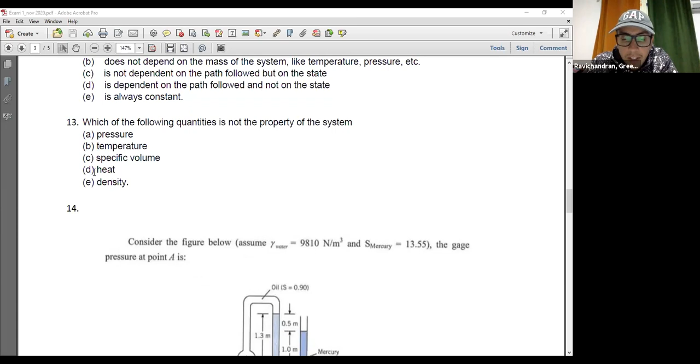13, D. Specific volume, C I think. Heat. Heat is not a property, it's a path function. Okay, 14.

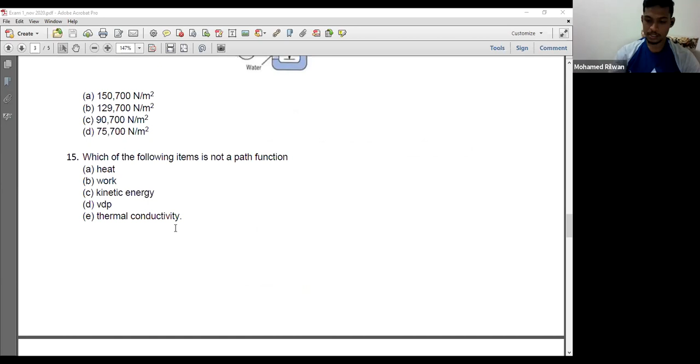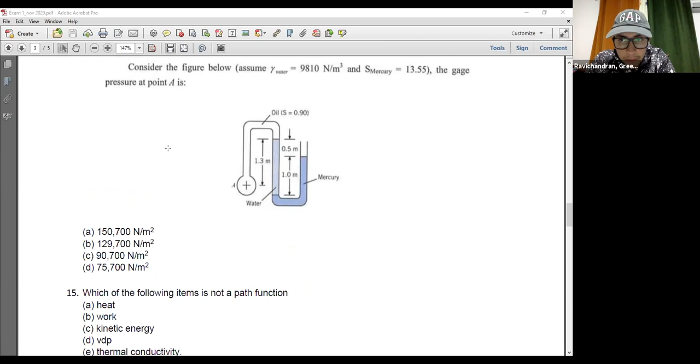15, so the following items, I put V D P. Which one? I'm talking about 15. 15 or 14? 14 we don't solve, yeah 15. D, no, 15 is thermal conductivity. Because thermal conductivity is a property, not a path function.

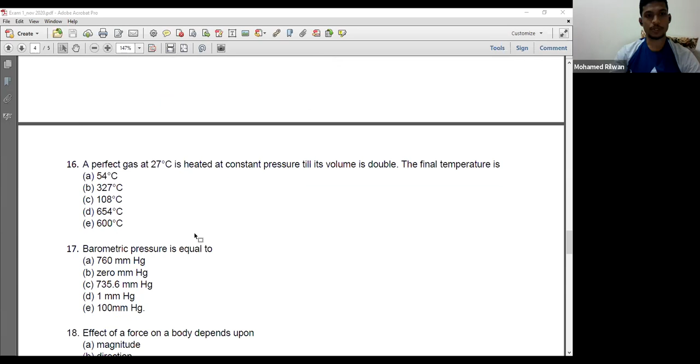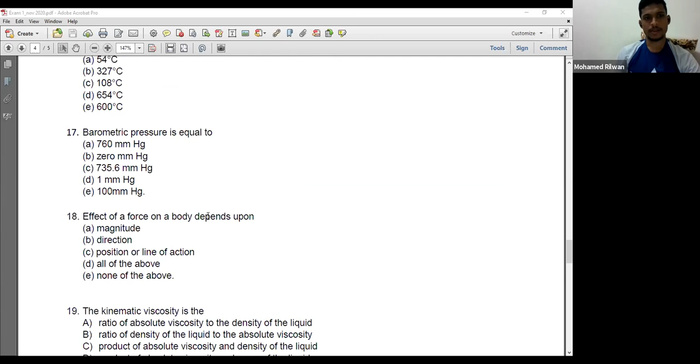Okay, 16. 54 degree, 54, yeah, A. Let's see answers together. Okay, 17. 760 mm Hg, yeah, all agree? A, yeah, okay A. 18.

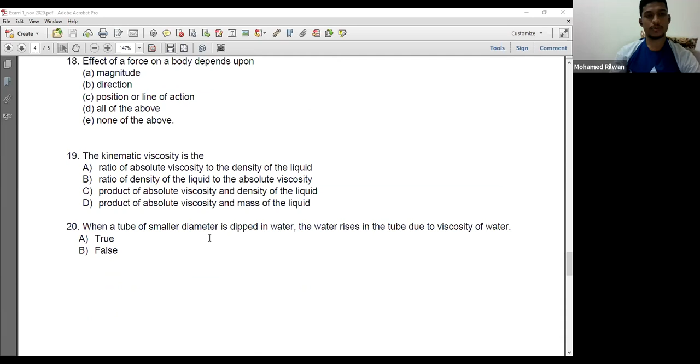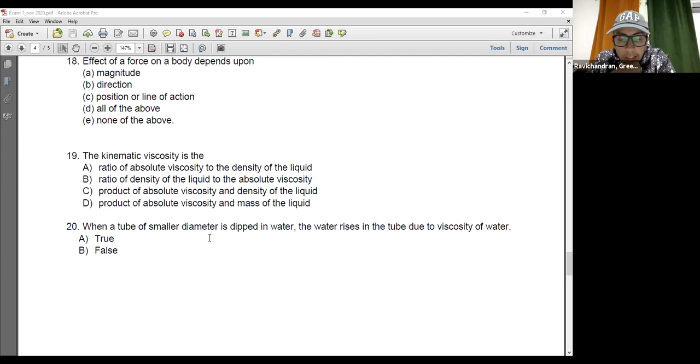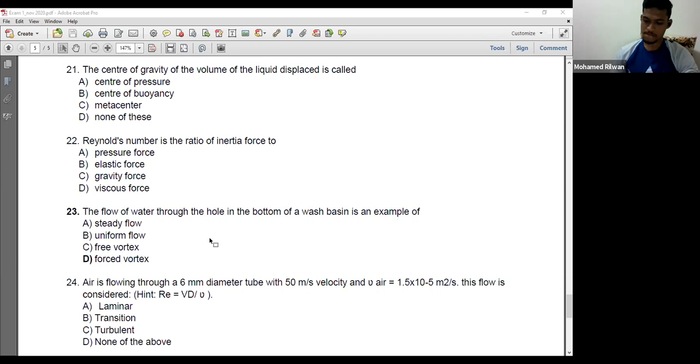Put this viscous, D, D. D, viscous force, yes. 23.

3 is uniform, C. No, it's vortex, free vortex, C, C, free vortex. C, free vortex, yes, C. 24.

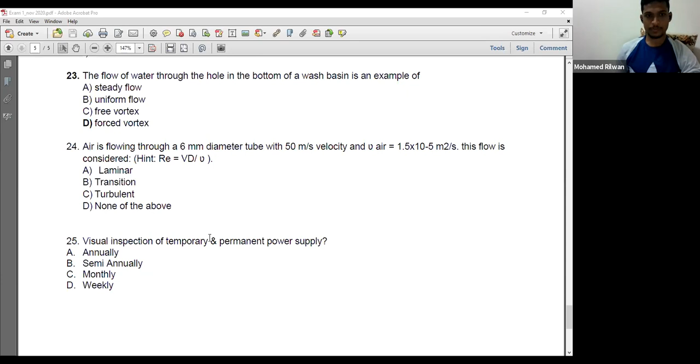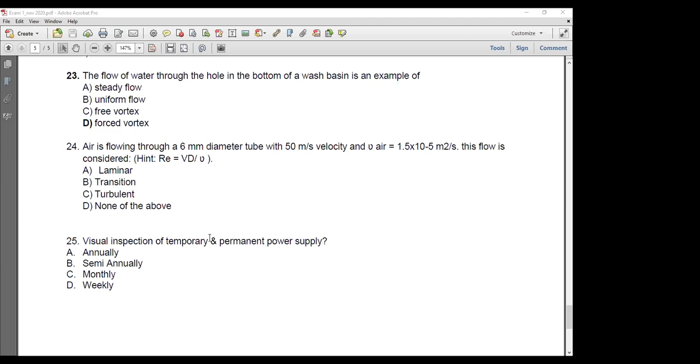What's the answer? Mute mic please. Anyone not solving or sharing with us, mute mic. Is that laminar? 25, we will solve 24 together. Because we have a debate here between laminar and turbulent. 25. B. 25 is A, yes. Let's go check the numerical problems.

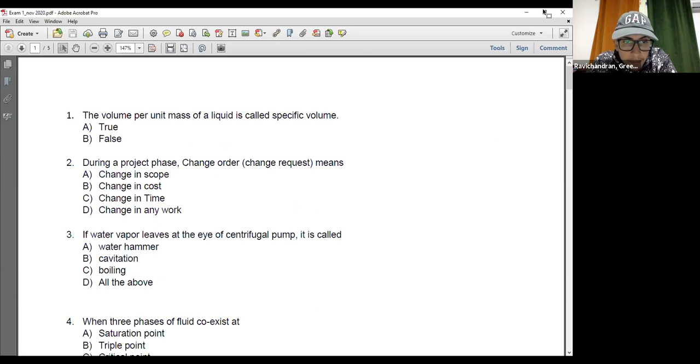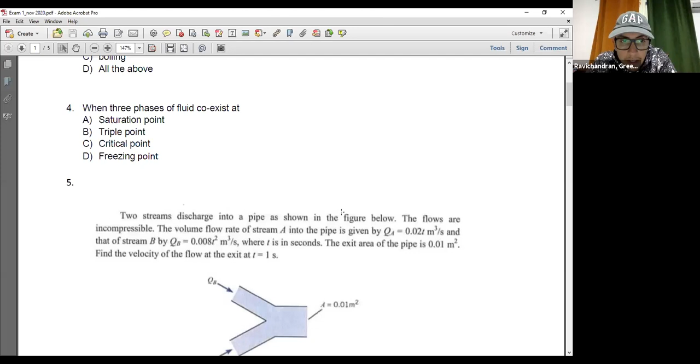Okay. It's 25. Question number 25. 25? 25 is A, yes, question number 25, answer is A. It's asking that, as for local code, I want to ask this question.

We at least check quarterly or semi-annually the power transfer. How does this become annually? When annually and when semi-annual, something like this? Yeah, we have a session for this one. No problem, okay, we will cover that in that session.

Yes we will, because we're not just giving QCDD or NFPA. NFPA says QCD asks more detailed questions for many things. For NFPA it's just specific for some questions, mainly related to inspection time and testing time. But we check every 3 months minimum, related to alarm, fire and safety, related to anywhere.

No, he's asking about power transfer, the Kahramaa or generator power. Kahramaa and generator power, I don't see this question before. The question is, he's asking whether change of power transfer means generator power or Kahramaa power. No, question again, yes, can you just open that question? Your voice is not clear, engineer, your voice is breaking.

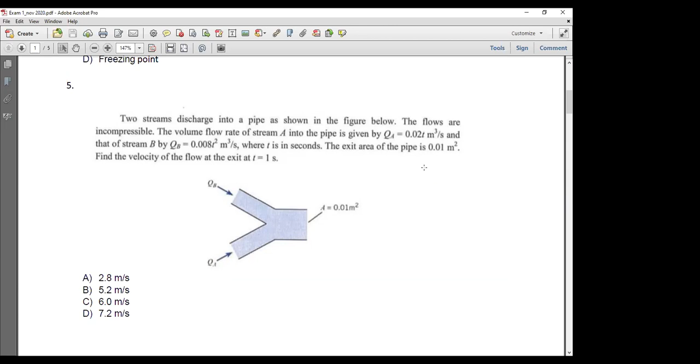Now focus with me on the answers please. 2 streams discharge into a pipe, as shown in the figure, the flows are incompressible, so we can follow the continuity equation directly. We will study the continuity equation today, this is the first thing we will start, and we will see this one.

This is what it is. At the beginning we see a circle, and now this happy face, but now it's continuity, okay. This is one of the famous equations used in the exam: Q equals A V, where Q is the discharge, A is area, V is velocity. So here, the volume flow rate at stream A into the pipe, this is stream A, QA is given directly as 0.02t meter cube per second.

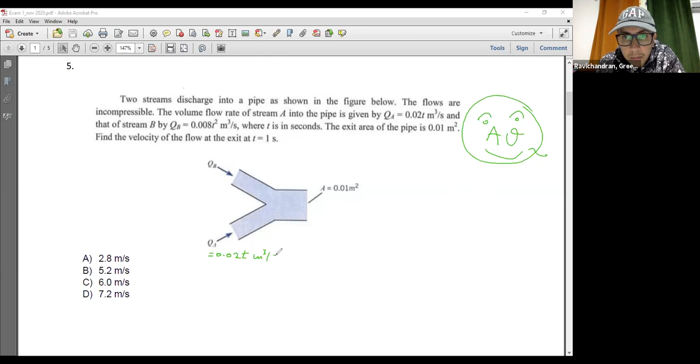And that of stream B by QB is equal to 0.008 T squared meter cube per second, where t is in seconds. The exit area of the pipe is 0.01 meter square. Find the velocity of the flow at the exit at time t equal 1 second.

So at time t equal 1 second, the required is velocity. As per the continuity equation we studied today, sum of Q in equals sum of Q out. How many inputs? A and B, so QA plus QB. How many outputs? One output, for example Q3, so this equals Q3, or whatever we call it.

So QA is given directly as 0.02t, plus QB given directly as 0.008t squared, equal to Q, which is equivalent to AV, because it's not given directly. So I will use the meaning of Q equals AV. He needs to calculate velocity at time t equal 1 second, so substitute for time t equal 1.

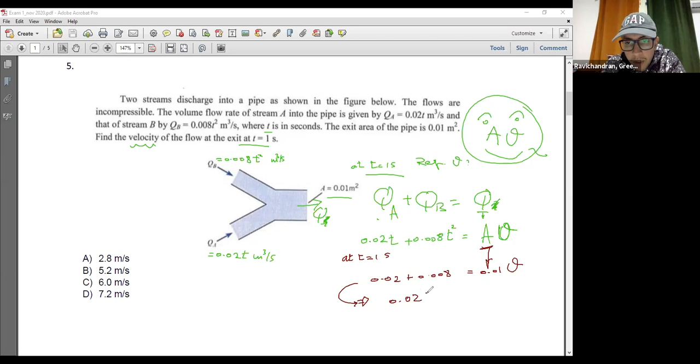Excuse me, is it 0.01 or 0.028? Which one, this one? There's some sum, 0.028, right here. Yeah, I didn't put the sum until now. This is the area, I substitute the area here. So this will be 0.028 equal 0.01 times velocity, this is the 0.01 area.

So the velocity is equal 0.028 divided by 0.01, which is equal to 2.8 meter per second. Any question for this one?

Clear. Okay, let's continue. Again,

As per the continuity equation we studied today, sum of Q in equals sum of Q out. So QA plus QB, this input here, equal to the output, which is this Q. This one is 0.02 plus 0.008t squared, and this is t equal to Q. He needs all this at t equal 1, so the sum of this is 0.028 equal Q. Now I know the Q here.

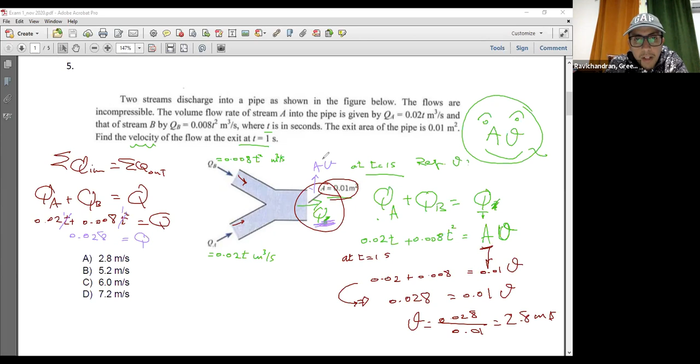This Q is equal AV. A I have, so the required actually is V, this is the exact required. So Q equal AV, which is equal 0.028. So V is equal 0.028 divided by the area, which area is equal 0.01 as given here. So this equals 2.8. Another way for solving. Now is it clear?

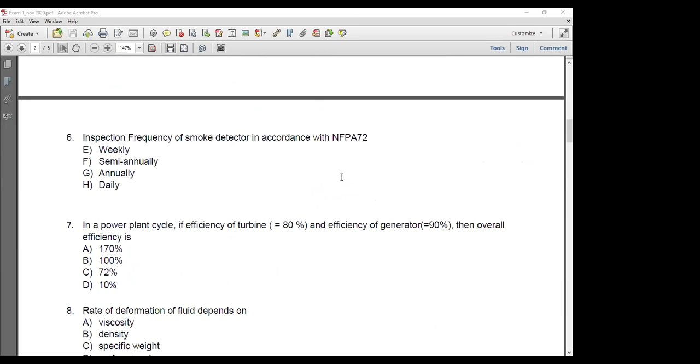Yes, it's clear. Okay. Question 7.

He gave eta for turbine, eta for generator. The efficiency, eta overall, is equal eta for turbine multiplied by eta for generator. We will see this in detail in the next session, inshallah, next Saturday, in the session on pumps. Why we're going to multiply these two together: 0.8 multiply 0.9, which is equal 0.72.

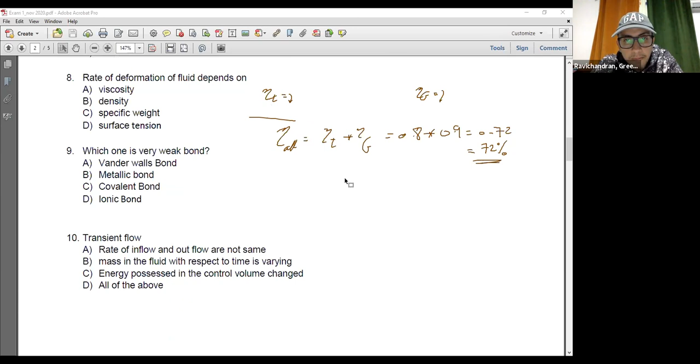It means 72%. Okay. Question number 14.

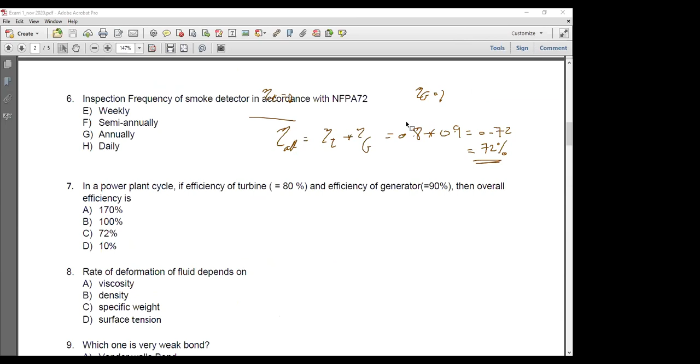Sorry doctor, one step back. Again, yeah, for the efficiency. Question 6, sorry, 7, yes, the one we just did, this one. This is for turbine and generator, right, this one. So we have to multiply, going to multiply, yes.

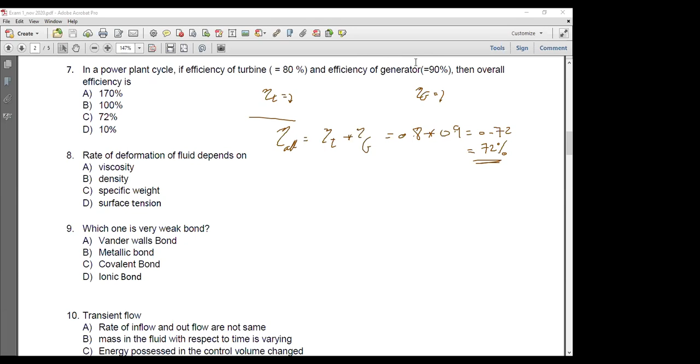Okay, so answer number 7 is answer C. Not sum, right? This is multiply, it's multiplication. I saw some answers for the same question where some traditional websites have added this one. No, the correct answer should be multiply, right? Multiply.

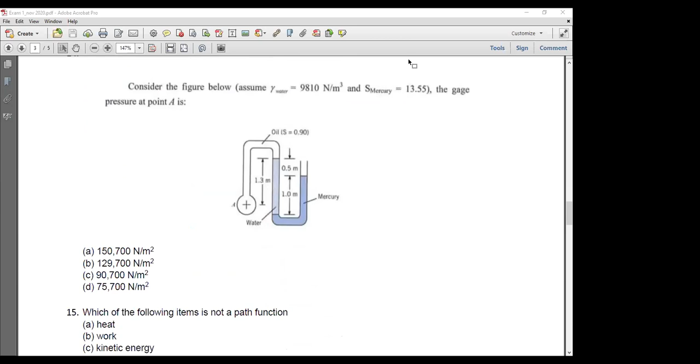Question 14. Below figure, assume gamma water is 9810 Newton per meter cube, S mercury is 13.55. The gauge pressure at point A, he needs the pressure here.

So we have one rule for the pressure. What is this rule? For same fluid, same height, it will give same pressure. So when you're going to calculate pressure at A, you calculate it starting from a known point. Where is the known point? This point, what is the pressure here?

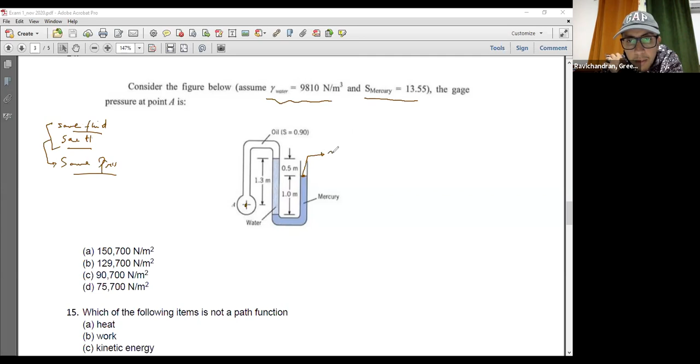The pressure here is normally atmospheric, which is equal to 100 kilopascal absolute, or 0 gauge. Normally we use it or consider it as 0 gauge, this is regular. So if we go by this way, how to get pressure at A from this point?

We will go step by step. Another rule: when we're going down, pressure increases. When we're going up, pressure decreases. So this is increase, this is decrease.

So here, this mercury, all this is mercury. Then going to the water here, that's okay. And going at the end for the oil, he gives you the specific gravity of the oil.

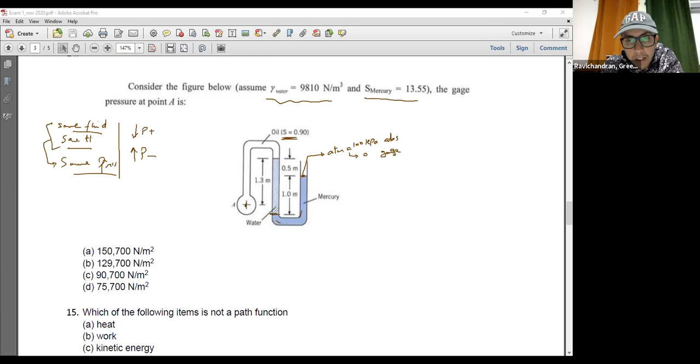So the mercury here, all this, same fluid, same height, it means at this point, the pressure, if you get it here, is the same pressure here, correct? So if I consider this one is P1 and this is P2, then this also is P2.

Then go next. This all is water. I don't change the fluid, so up to this point, all is water. So I will get the pressure here, P3.

Now we change to oil. From water, change it to oil. This is another fluid, so we calculate again another pressure. So this oil, just take leveling like this, same height. Same height, same fluid, same pressure. So the pressure here also again is P3.

So from this point to this point, this same liquid here, gamma, we can get PA. So the sequence to get PA, we need to get P3, because if I know P3, I will go down, so I will just add plus this head.

Correct? Because this head pressure is the head above the point. If you need the point here, what's the calculation at this point? It is the head above this point. That's it. So if I need the calculation for the pressure of PA, it's the pressure at P3 plus the head above. That's it. But I don't know P3.

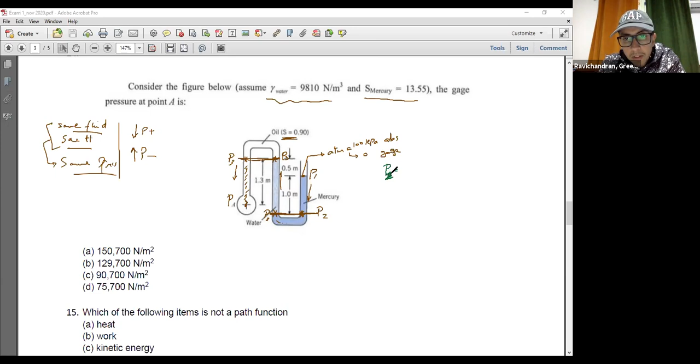For the steps: PA is equal... we can write it from P2. P2 equals P1. Going up or going down? From P1, going down, so plus gamma H. What is this gamma and what is this H?

This is the head, the head of column, which is P equals gamma H. Gamma for the liquid itself, gamma mercury. So this one is gamma mercury. H, which H? This one here, from this point to this point, which is equal to 1 meter. So this H is 1 meter.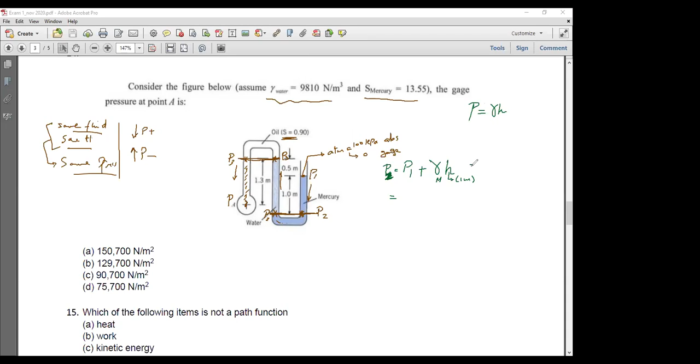So we can write it as substitution. Right here is the substitution: 0 plus gamma mercury. How to get gamma mercury? Gamma mercury here is given by specific gravity. So if I have a specific gravity, we can get gamma mercury from this. How can we?

S is equal to gamma for the fluid divided by gamma for the water. So gamma for any fluid is equal to S multiplied by gamma water. Correct? That's okay. So if you need gamma mercury from here, it is equal to gamma water multiplied by S mercury. So it is equal to what? 9810, which is given here, multiplied by 13.55.

This is gamma mercury, so I write it here: 9810 multiplied by 13.55 multiplied by 1 meter multiplied by 1. This H is 1 meter. Now we know P2.

P3 is equal to P2. P3 equals P2, I'm going up, so minus gamma. Which gamma here? This is gamma water, 1 gamma H. Which H? From this point to this point, 1.5, which is equal to 1.5 meter.

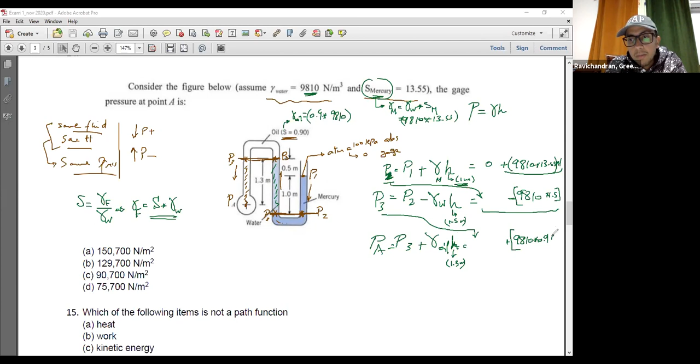Gamma oil equals S for oil, which is 0.9, multiply gamma water, which is 9810. Same like we did it before. So we write here P3 in this way, which is equivalent to this calculation. And plus gamma oil, 9810 multiply 0.9, all this multiply 1.3. That's it. Now we get PA.

But if you want to get it in one step, we can write it as it is. PA equal to, I start by this one, P1, which is equal 0. I'm going now down, which is plus this part, gamma mercury times H1 meter. So gamma mercury 9810 multiply 13.55 multiply 1 meter height.

Then I am going up, so minus, open bracket. Gamma water H, gamma water is 9810, H is 1.5. I am here, step jump, here, down, plus, open bracket. I'm going down for gamma oil, which is 9810, multiply 0.9, multiply the height 1.3 in one step.

If you check this one here, I put it here. So here, there, this one minus this one, here. This one minus this one, then plus this one, plus this one. Clear or no?

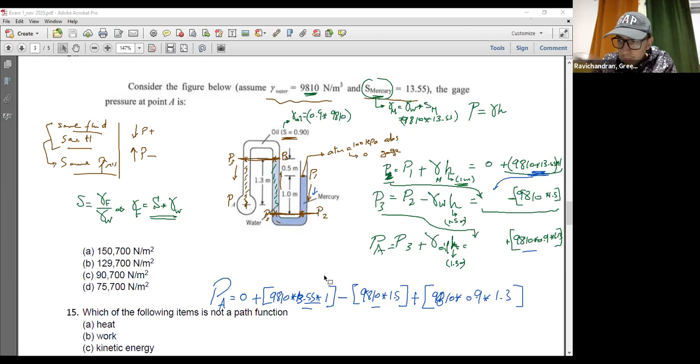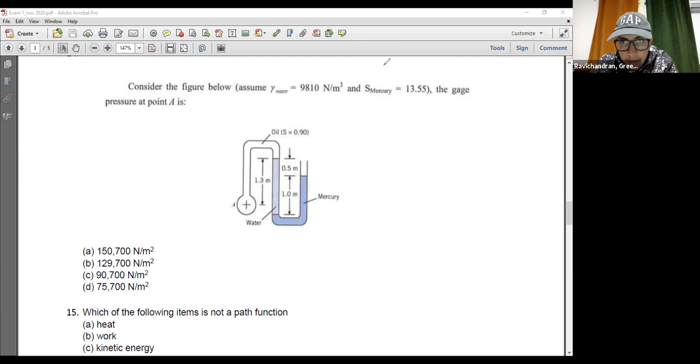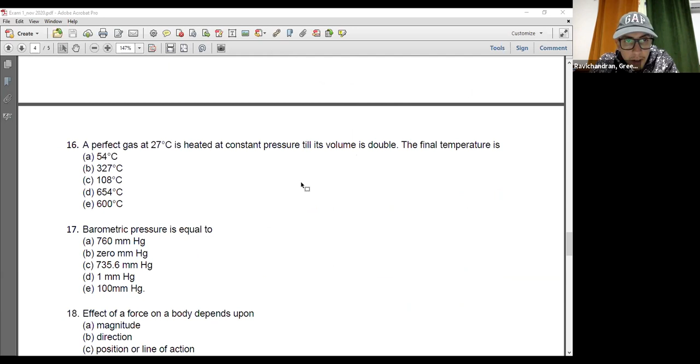Let's see question number 16. I see many confused for this question.

Perfect gas at 27 Celsius is heated at constant pressure, so P is constant, this is T1, till its volume is double, so V2 equals... The final temperature is, this is the final temperature. At P equal constant, we can follow the ideal gas equations.

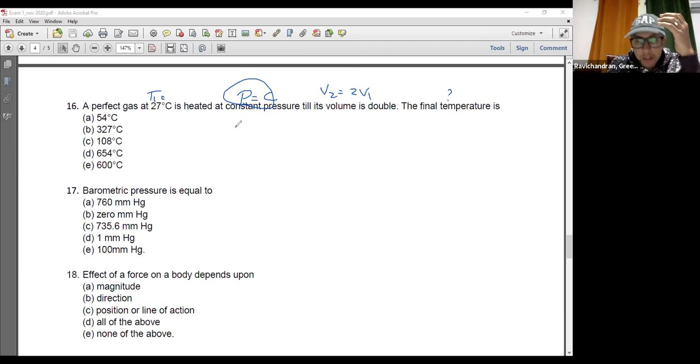I think Charles' law. So V1 by V2 equal T1 by T2. So V1 is the same V1, V2 is 2V1, equal T1, 27, divided by T2. Cancel V1 with V1. So what's remaining? T2 equal what?

54. 54, which is wrong. Why? Because it must be absolute, it must be Kelvin. All temperature must be Kelvin for perfect gas equations. So this one should be plus 273 to be Kelvin.

Now T2 is equal to what? 600. So the answer is? Letter E. It is wrong also.

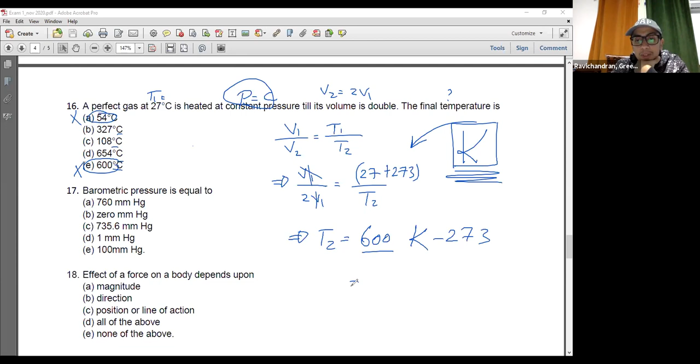Why? This 600 Kelvin, but all the choices here are by Celsius. So we need to go back to Celsius, minus 273 to get the answer by Celsius, which is 327. You see how many traps in this problem? Very easy problem to solve, but 3 tricks.

If you pass the first one, I don't keep you to run, you see the second trap and then the third one. Okay, so the final answer is 327, which is equal to... Formula is only in Kelvin, unit Kelvin.

Huh? Yes. Formula, what's this formula? Perfect gas formula. Yes, yes, all ideal gas. Any ideal gas equations use temperature by Kelvin. Okay, then volume unit, volume, normal volume, no problem.

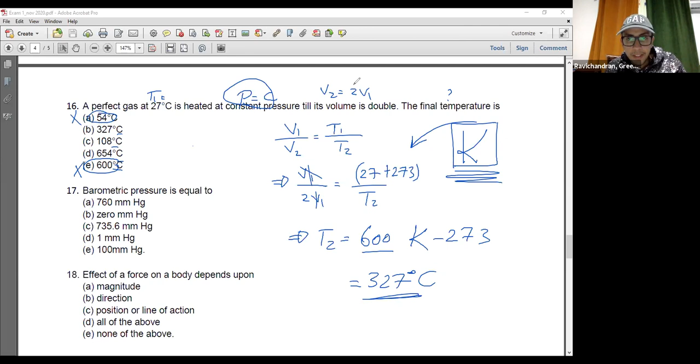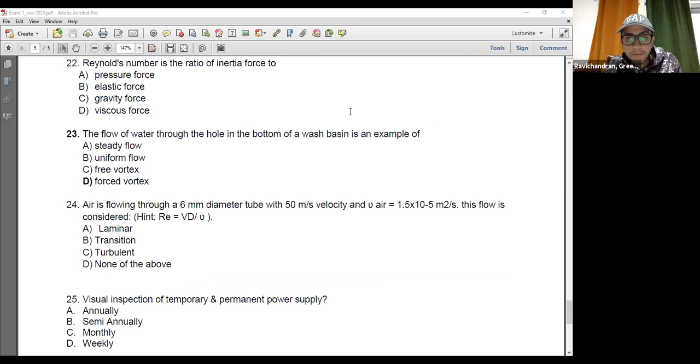Let's continue. Aha, 24 still remaining, 24. Air is flowing through 6 millimeter diameter. So this diameter, velocity, nu kinematic viscosity.

So this Reynolds number, just need to substitute. Reynolds number is V multiply D, so we need to multiply 10 to the power negative 3. Don't forget this one to be meter. And the last is nu, 1.5 multiply 10 to the power negative 5.

Be careful for negative 5 or negative 3 and so on. Okay, many confusion for the calculation for this part. First, don't forget this one, to change unit from millimeter to meter. There's many traps for this stage.

So at the end, you will see this -5, this -3. We can cancel 3 with 5, and the remaining is 2 here. And we can make it up for this 2 above to be easy for you. Okay, like this, you can write it as 50 multiply 6, 1.5, and keep this cancel, this one with this one, and the remaining 2. Then go up for the remaining, which is 10 to the power 2. So I think it's easier for calculation now.

Okay, so the answer is 20,000, not 2,000. 20,000. Who is getting 2,000? You are not... only engineer gets this one. I see this for many batches.

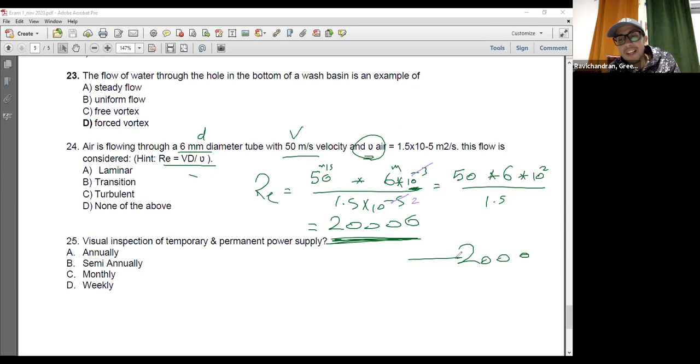Get it 2,000 and the other gets 20,000, but it's a very tricky answer. Why? Because 2,000 is going to select laminar, but 20,000 is going to select turbulent. I agree, if the answer is 40,000, for example, and you get 4,000, in both cases it's turbulent, but he gave you numbers to be clear. If you get this, you select another choice. So be careful with calculation and units. I focus on this from the introduction session.

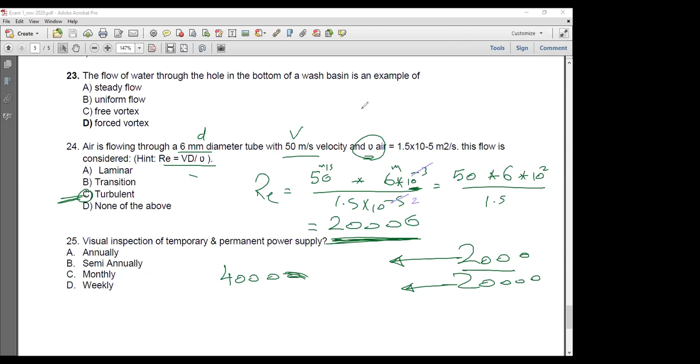Units, calculation, so the correct answer is C, turbulent. If you don't mind, Doctor, can we just review the average again? Meaning if it is above 2,300, it should be laminar below that, and above... Yeah, the ranges? The ranges of laminar values and turbulent values. Okay, that's only the number.

2,300, 4,000: below this number is laminar, above this number is turbulent, in between is transition. Okay, that's it. Below this number is laminar, above this number is turbulent, in between is transition. Clear? Now it's clear. Any question?

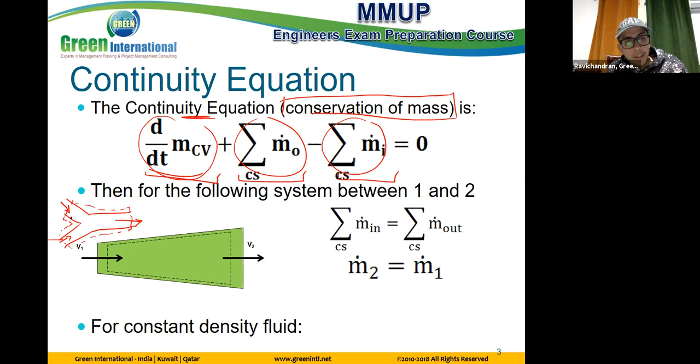You see here any mass, it is already accumulated inside here. What I know — do you see any stored mass here inside? You have any stored mass here? It means the mass from the two inputs doesn't go out. Any mass going in the pipe should go out from this pipe. No, inside nothing is remaining. Anything going in, going out, especially for pipeline, so this term we don't need in these conditions. It's actually zero, because this refers to what happened inside the control volume.

This we can see normally for something like this: we have a tank, and we have an orifice, and we have flow here. And this flow is going to increase, decrease, or something like this according to the amount in, amount out. So if I'm going to study the control volume for the tank here, I will check the control volume for the tank — I have in and I have out, and also I have a change inside the control volume. It appears in this term. So for normal problems, the problems coming are pipeline problems.

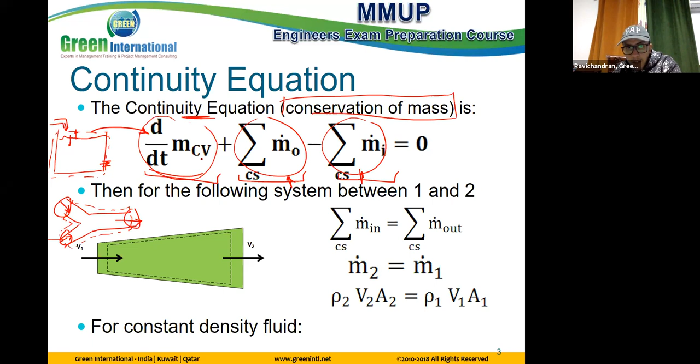So this term we don't see in the solving equation for the exam. So we will focus on the two terms here, this one and this one. So when this one is 0, the sum of m dot in is equal to the sum of m dot out. That's it. Still, this m dot — where is q? M dot is mass flow rate, related to units of mass per unit time. So what is m dot, mass flow rate? It is equal to rho VA. So rho VA for out is equal to rho VA for in, if we apply this for this case — we have one in, we have one out. In case of constant density, which is incompressible, this condition is mentioned in the equation.

If you go back to the question in the exam, he mentioned to you, I have a fluid incompressible. So he tells you one information: incompressible means density constant. So for density constant, this rho is the same rho, we can cancel together. If I cancel these two, it is now not m dot, it will be Q. So this is the reason for using Q directly, not m dot, because this is incompressible flow. When I can see the effect for density in the equation, if this flow is compressible, which refers to gases, not liquids.

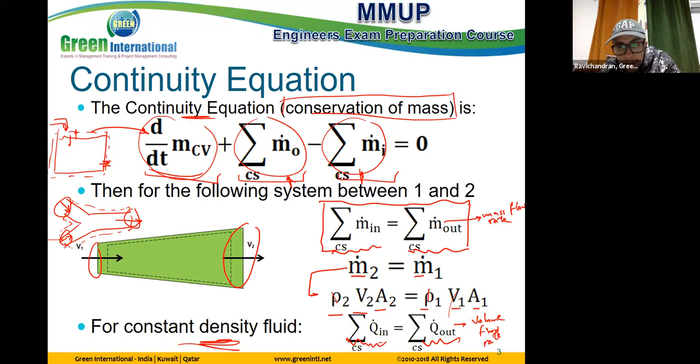This is one of the most important equations ever in the exam. An ideal flow of any fluid must fulfill the following: continuity equation, continuity equation.

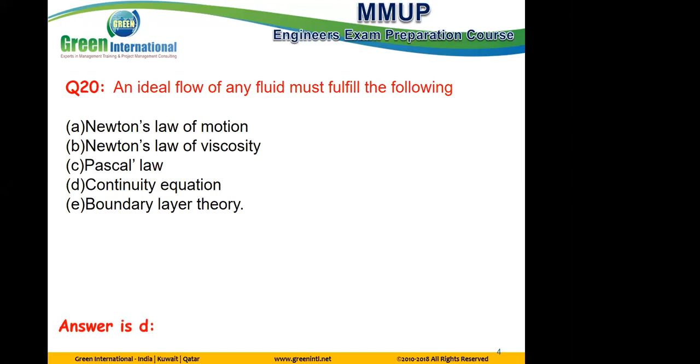Another problem for continuity. Can you check, please? I give you 1 minute for reading and then we're going to solve it.

Sorry, Doctor, please go back for the first question. Thank you. Okay.

Reading finished, let's go start solving. What's given? Given is given here already: diameter, velocity, diameter, and required is velocity. One input, second input, this is the third but this is output. So 2 inputs and 1 output. Let's see what is required. The required is the velocity.

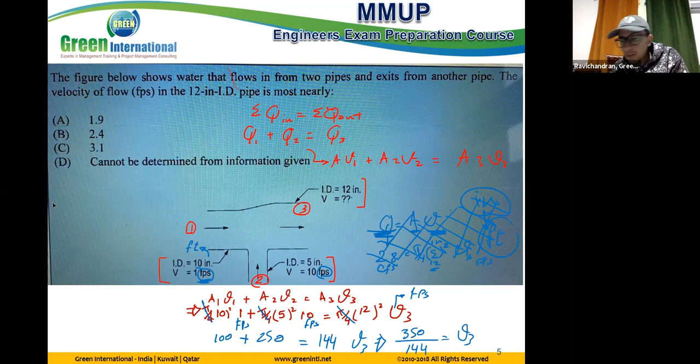So let's continue the V3. This will be 100 plus 250, 144. V3 is equal to 350 by 144, equal to what? Anyone get the answer? 2.4. So the exact answer is B, okay.

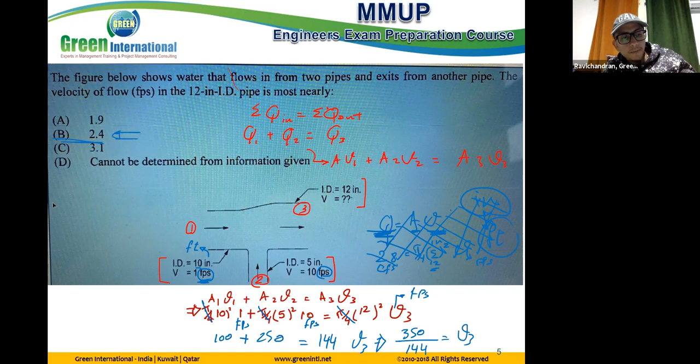Bernoulli equation is the second important thing in fluid mechanics. Bernoulli equation comes to study energy for the fluids. This energy comes from three sources: flow energy, potential energy, and kinetic energy. These are the three terms.

Flow energy is described by P over rho. Potential energy is Gz. Kinetic energy is V square over 2, equal to constant, which is referred to as total energy. But normally for numerical problems, we don't use this form. It's not the famous form. The famous form used a lot in solving problems is the head form.

Head form also represents energy, but in the shape of head. So to change this to be represented by head form, we divide all by G. So we divide this by G: P over rho G here, G here cancels with G leaving Z, G here is G rho which is gamma, and this will be the same V square over 2G, equal to constant.

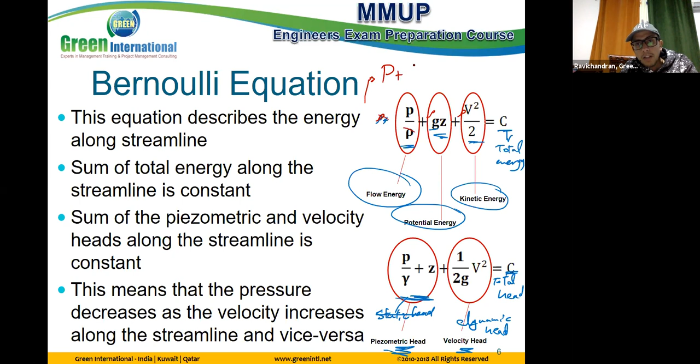Next term: rho G Z. Rho G is gamma, so it's gamma Z. This rho will be the same: rho V square over 2, equals C. The first term is piezometric pressure, or static pressure. The next one is dynamic pressure. And the total is total pressure. Now we see the form of energy in three forms: energy form, head form, and pressure form.

What's different? Energy form uses unit of energy. Head form uses unit of head, meter, or length, feet, or whatever. Pressure form is unit of pressure. That's it. Okay, what's the condition for this Bernoulli equation or energy equation?

This is an energy equation, but we call this one Bernoulli. Why? What's the difference between energy as a general equation and Bernoulli? The difference is Bernoulli is for ideal conditions, there are no losses here. The general energy equation has losses, and we have equipment inside like pumps - you'll see this in the next session. But now we study the regular one without any losses. This equation describes the energy along a streamline without any losses.

And this Bernoulli equation says that the energy at any point is constant - constant equal constant total. It means that one point has energy and another point has energy, but you said to me this flow is moving, so maybe the velocity changes, pressure changes, altitude or elevation changes. Yes, but if one of these terms changes, the other one changes too, so the summation of these terms at the end should be the same. It means you have multiple terms, but the sum of these terms is equal all the time - this one increases, this one decreases, so up and down, but at the end the total is constant along the streamline.

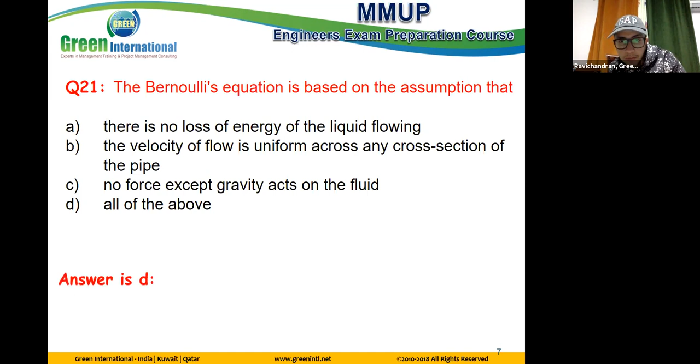Euler's equation is another approach, from Lagrange. Lagrange is used to apply Bernoulli. This Euler equation is another approach to get or describe the energy equation.

Here it is not described by velocity, it's described by acceleration. So the total equation is not referred to scalar values, it's referred to vector values. So it's more difficult to study numerically, but I'll just give you small information about Euler's.

Used to study pressure variation, Newton's second law of motion applied to fluid particles for inviscid and incompressible flow. So two conditions: inviscid and incompressible. Inviscid means the effect of viscosity is very small on the dynamic motion of the flow. This is inviscid.

Static pressure is the pressure of flowing fluid at any point. This is normal flow. A pressure tap is a small hole in the pipe.

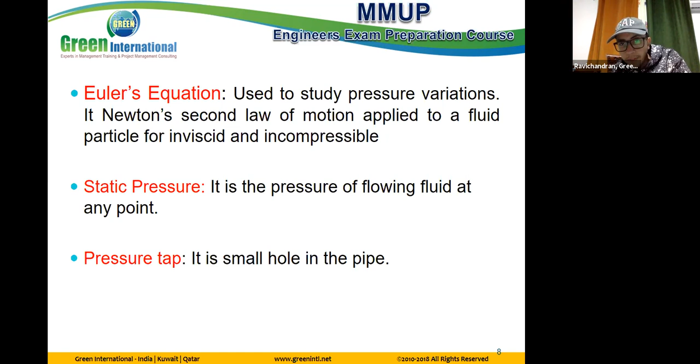Read this one carefully, please, and then we're going to solve this exam question.

Let's start by describing the problem and noting some points. This flow is moving in the duct and we have two pipes. One pipe is just put directly facing the flow. This one is just one hole, but this pipe actually reaches up to here from inside, but it's seen from another side. The pipe goes from the middle of the duct, so it reaches inside up to here, but it's still a pipe. This one just takes an L shape.

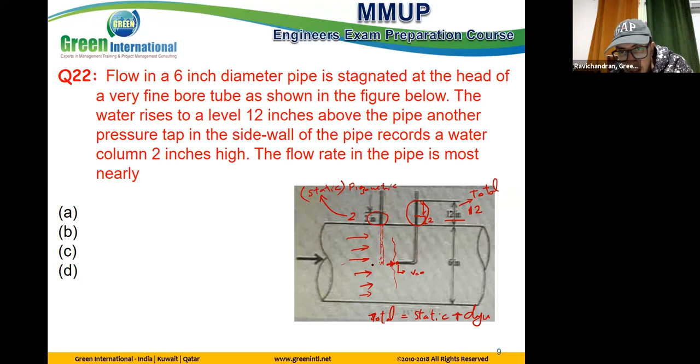So dynamic in the energy is not affected there. So what you feel by this pipe is only static. But here, in this case, the velocity will be zero.

So this one will be zero, so all the energy goes to refer to head. So it refers to static, plus the other velocity also goes to refer to head, another head. So it represents static plus dynamic, and static plus dynamic equals total. So from this reading we can read static and we can read total.

This Pitot tube is one of the famous methods to measure velocity. Okay, what is required? I'll tell you here in this problem: this is the stagnation point, and the water rises here 12 inches, and this rises 2 inches. The requirement is to find the flow rate in the pipe, he requests Q.

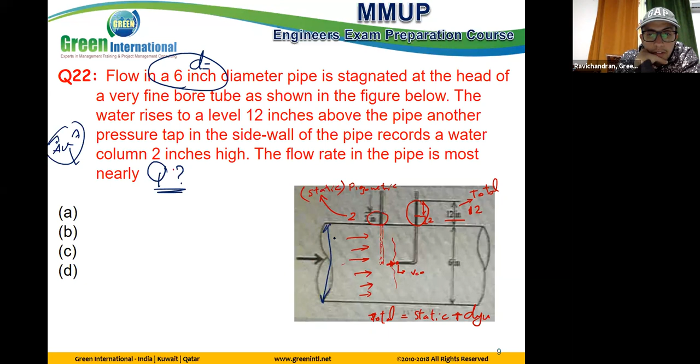Flow rate in the pipe. To get Q, what's Q? Q equals A times V. They use the diameter here for the duct itself, this duct, 6 inch. So let's see, Q equals AV. A I have, because I have diameter. So the remaining is velocity.

How to get velocity? If you remember the equation for energy, total energy H total equals H static plus H dynamic. Can you write it by formula? The total, which is C, is equal to static, which is P over gamma plus Z, plus H dynamic, which is V squared over 2G. So P over gamma plus Z plus V squared over 2G, that's dynamic, this is static.

Okay, let's check first. What do you read here? Static, this one. And also the other one is total. So from these two you can get what? Dynamic. And this dynamic equals what? V squared over 2G, which includes velocity. So if I know this value, I can get velocity. You understand the way now for the answer?

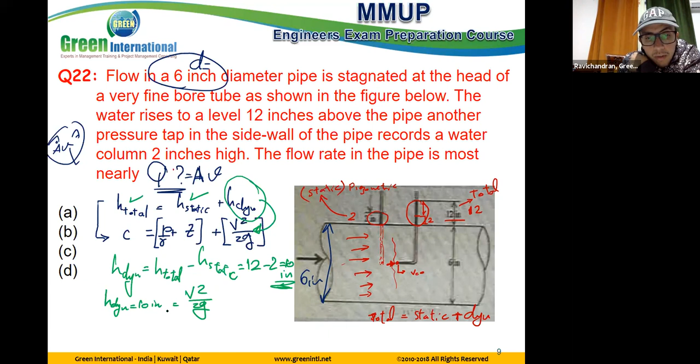What you need is V to continue and get Q. So V equals the square root of 2 multiplied by G. What is G? 9.81, or 32.2. This G, 32.2 feet per second squared, multiplied by H, which is 10.

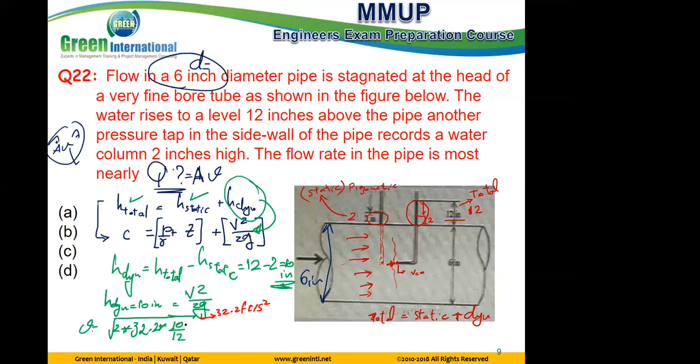Accepted as 10 inch? No, it should be divided by 12, to change it from inch to feet, correct? So this one is feet, this is feet per second squared, so feet squared per second squared, divided and rooted like this, gets feet per second. So what is the velocity here from this equation?

We can check and get the answer. After you get V, you can get Q. So Q equals A, which is pi over 4, D squared. D equals what? 6, but is it 6 inches? 6 divided by 12, why? Because the velocity is feet per second, so this one should be feet also, multiplied by the velocity which we got here.

Anyone get the answer or something like this? Anyone check? One solve? I got this one. You can check again after me.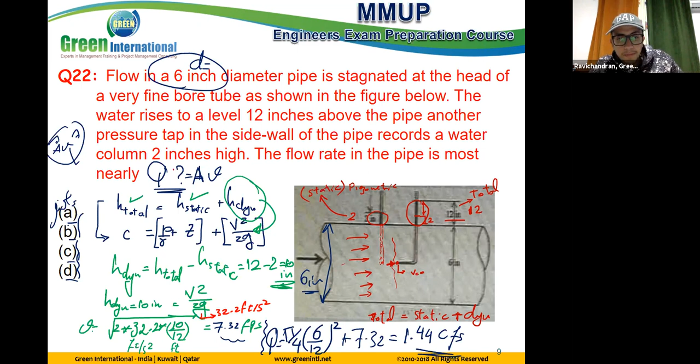Any question? No question? Here, read this question please. Give me the answer.

You can, at the beginning, just check the choices without reading anything or seeing the figure. You can keep this hidden, and the question you can keep hidden also, and just read the choices. You can select the answer. Trust me.

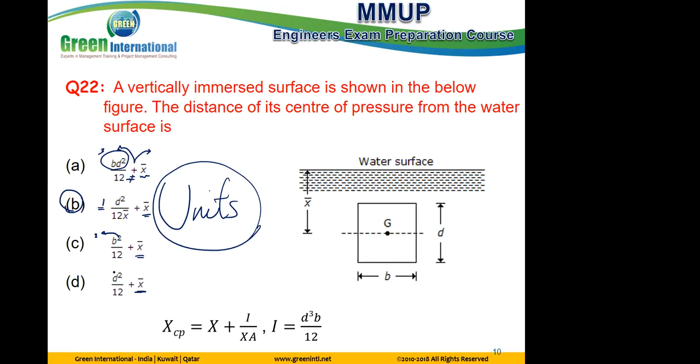BD square, so the length is cubic. Here length is also a unit of length, but this square divided by unit obtains a unit which is the same unit of length, which is accepted - unit of length, but squared, so it's area, accepted. But this other one is two different units, so it's not accepted. So the answer is this one.

I bring this new equation to be aware of the other information, what is the question, and the meaning of each term, and I'll give you some notes. First, this submerged body - any body inside the liquid - has exerted pressure or forces due to pressure on the face of this body.

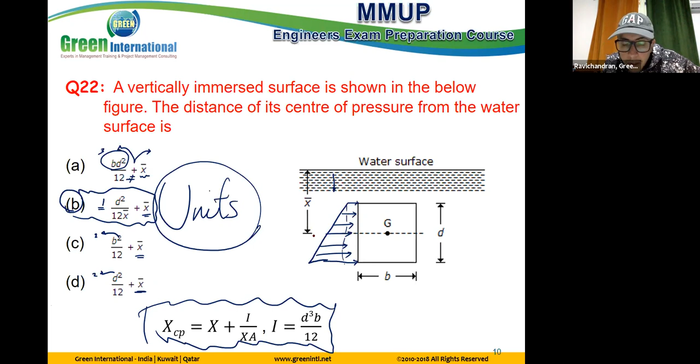This pressure is distributed from the above point to the below point, but it is not equal. So the force due to this pressure is not equal, because as you know, when you go down, the pressure increases. So the pressure here also increases, the distribution increases like this. According to this increasing distribution, the resultant force due to pressure is somewhere not in the middle - it's below the middle, because the maximum is below. So it's somewhere here.

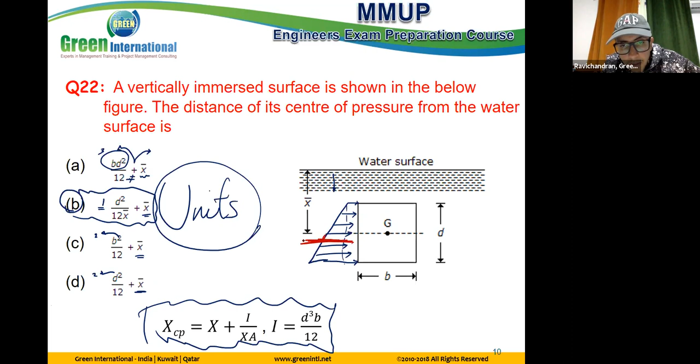This is the equivalent for these forces - this force due to pressure, the resultant for all these distributed forces, acting at a point called the center of pressure, which is required here. This is the required center of pressure. What is its distance from the surface?

What is the other x here? The center of gravity. Any body has a center of gravity where the weight acts down, and the buoyant force acts up. But the buoyant force is at a different point. This g point for the body depends on the shape of the body. Okay, and this is the center of pressure.

For example, the distance of the center of pressure from the surface - how to get this? It is equal to x bar, the distance from the center of gravity up to the surface, plus this small distance. How to get this small distance? By this equation: x center of pressure equals x bar plus I bar divided by x bar times area.

This I - what is it? Second moment of inertia. What is x bar? This x bar is the distance from the centroid or center of gravity to the surface, and the area is the area of the body. This I depends on the shape.

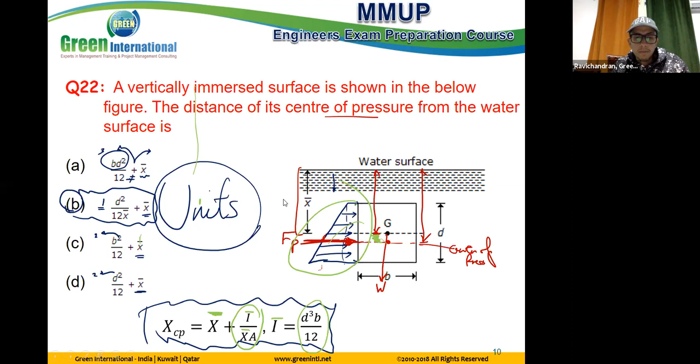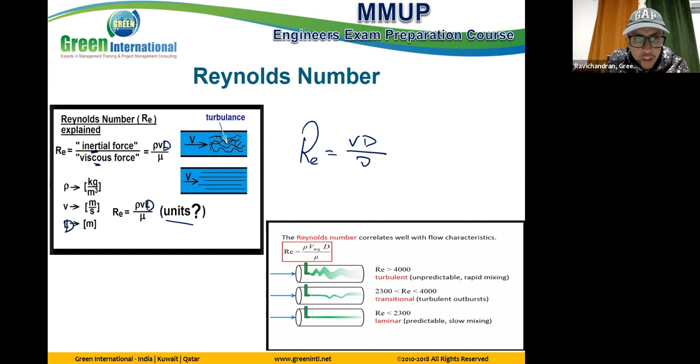Let's see some important numbers. Reynolds number - we discussed this one. Reynolds number equals Vd over nu, or in the regular equation rho Vd over mu, where d is in meters. The units are dimensionless. What is the definition? It's important, asked a lot - inertia force divided by viscous force. The range for Reynolds number to classify the flow is 2,300: below is laminar, 4,000 and above is turbulent, and in between is transitional.